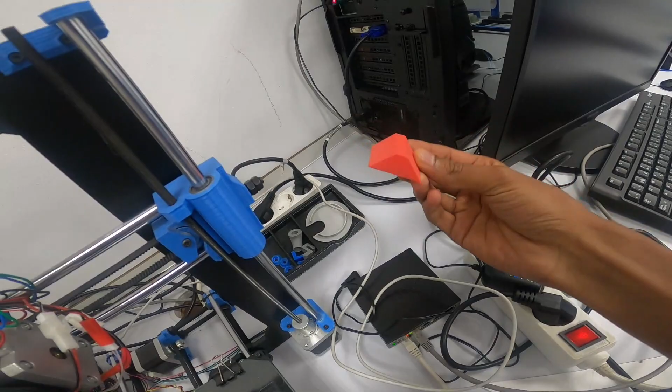Now we are moving towards the first lab, which is located at the international office of the UPCT. So let's watch what is inside the lab. We have two different labs we are going to visit. The first one is more related for classes, for laboratory practice. Okay, this one.

We have two different channels. This one has 12.5 meter length and 30 centimeters of width. This is just an open channel. This is a labyrinth weir that we are trying to analyze to know how it's working. Here we have another channel, a smaller one than this. And there is no water inside here.

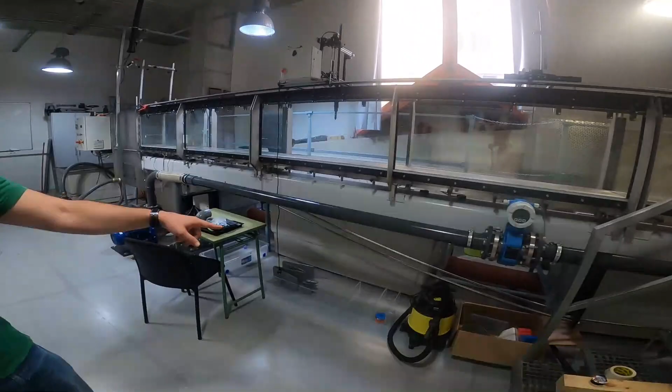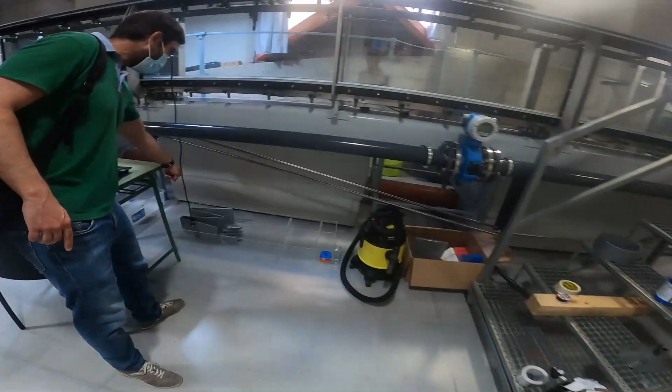Now we removed the water. I think this lab is now under construction. No, it's the other. Here you have several non-linear weirs. This is a labyrinth. This is a piano key weir that we test here. And there you have other models.

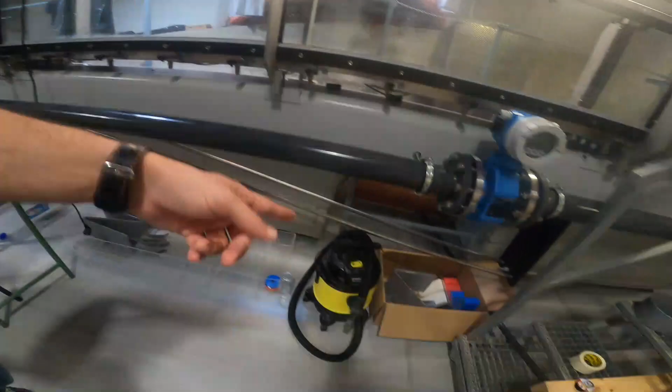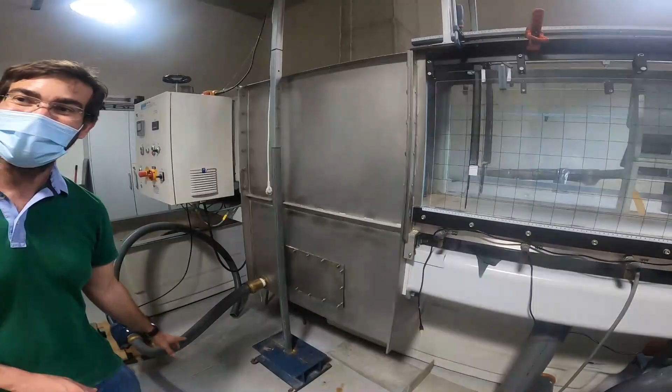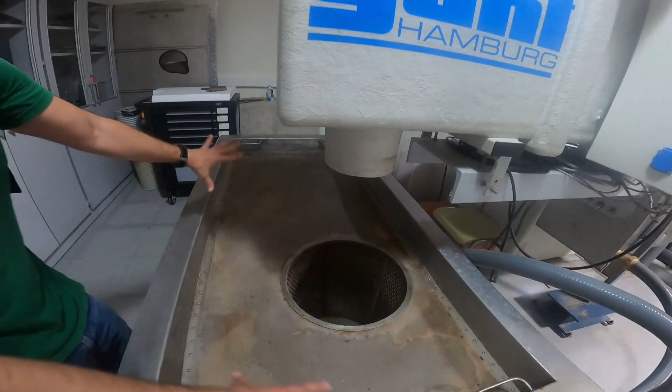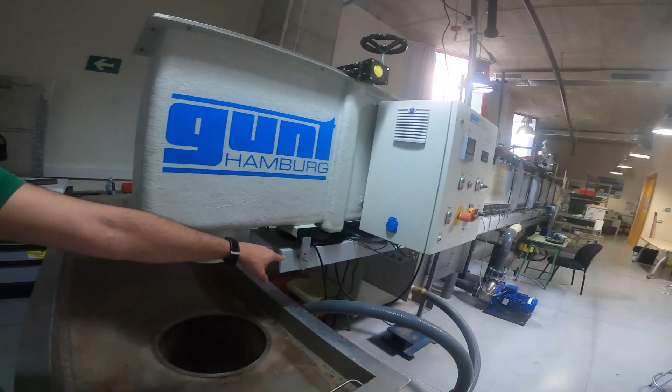This is a sediment trap, so we can recirculate water and also sand. What is this, the collector? Yes, this is the final part. This is the reservoir to maintain the water, and this is the filter for the sand. If the sand is not trapped by the sediment trap, it finishes here in this filter.

Here we have different parts. Ogee crested weir. This is a Venturi. This is for the smaller one, and here we have broad crested weir, radial gate, a plain vertical gate, piers with different shapes. Here we have different shapes and different types.

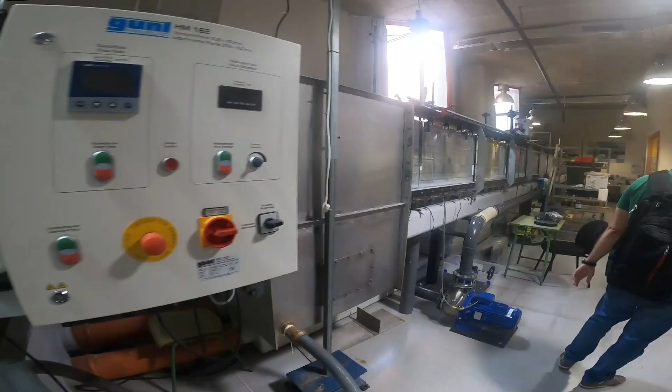Nobody is working here inside the lab right now. Here we have several of these with hydraulic jumps, with ski jump bucket, Parshall flumes, different weirs. Those are also for the water, to maintain the water. They all have a reservoir.

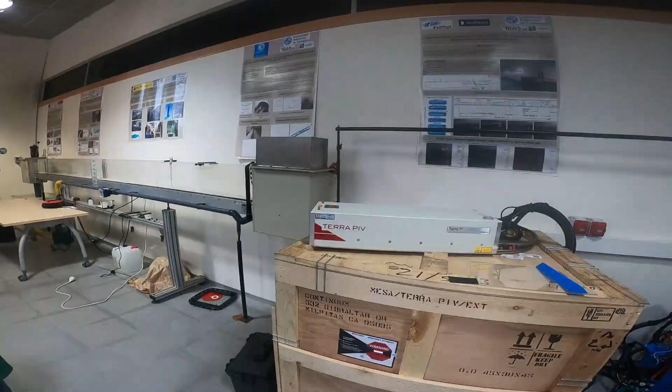This is a laser to measure with high speed cameras to obtain the flow velocities of the particles of the water. It is joined to the computer and gives data directly to the computer. You can obtain an image like this, the velocity distribution. Here you have the arrows indicating the velocity of the fluid.

Those are several studies we have performed in the last years with some universities, with the ministry. This is a study of a dam in Ecuador. This is another model that we have. Here is water.

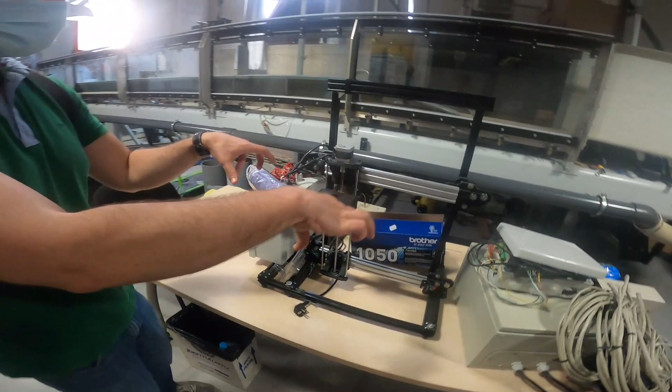This is a robotic location system for our probes that we are developing, to make it easier to obtain the data instead of using only the point gauge, to have something more automatic. This is one lab and there is another lab also. Okay, let's go.

After watching the first lab, we move toward the second lab of UPCT. So let's watch what is inside the lab.

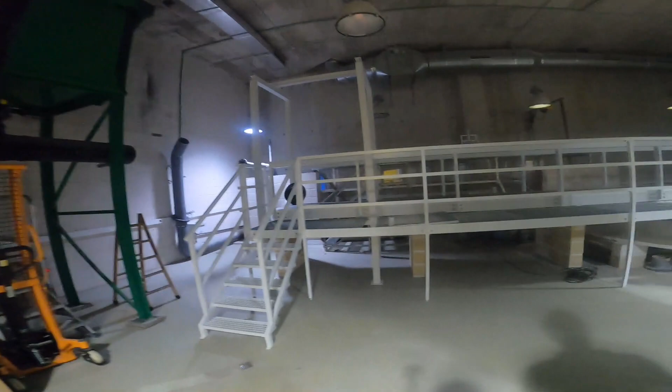So let's move one by one. Okay. This is a tank, also for water, but we are not using it right now. We have another tank in the reservoir for all the water.

So here, you can see we are changing. Here we have the pumps, the different pumps. We have 3 different submerged pumps to send the water by the pipe to the different models. This is a new channel that we are building. Okay.

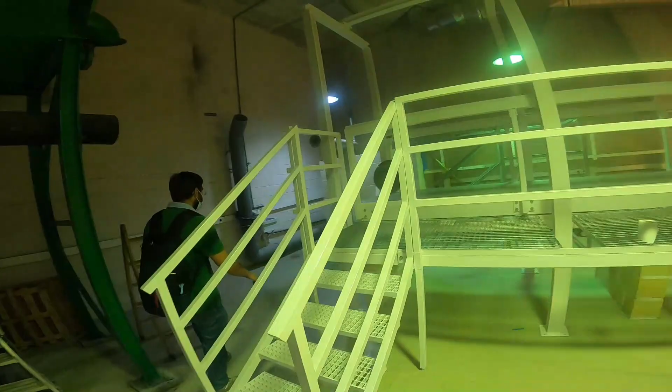The new one here. And inside here, any turbine? In Alfonso 13 we have a turbine, a Pelton turbine. Those are connectors for pressure sensors or piezometers.

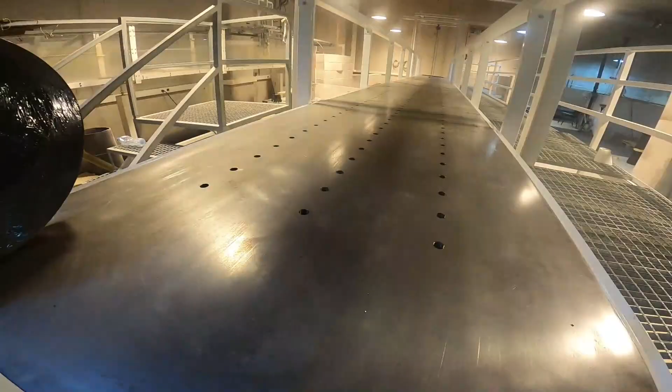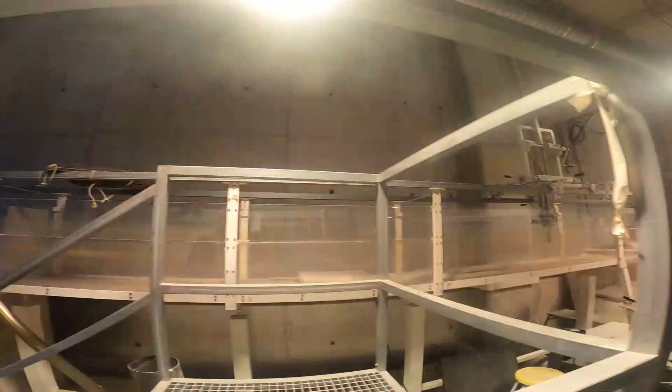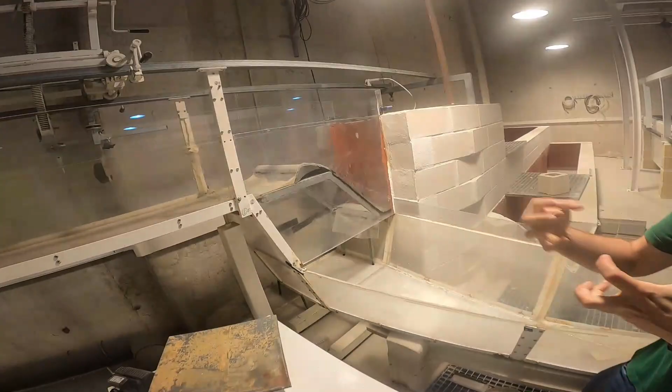Okay. This is another open channel flow. In this case, to analyze bottom intake systems, bottom racks. The idea is to collect the maximum amount of water with the racks, and all the sediment continuing in the river.

So this is the channel for water collected, and the sediment, the sand, the gravels continuing in the river. And this is sand, because we are testing with sand and different materials. And what can we find out from this experiment?

Here we are analyzing the clogging phenomenon. Clogging means clogging inside the pipe? Clogging is when you have, we can see there in the racks. Okay, let's go. You can see the rack.

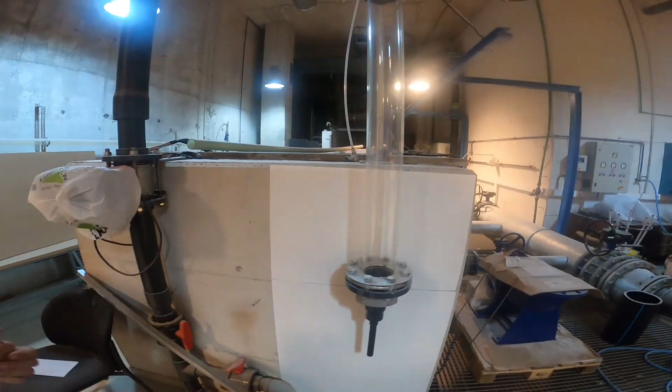This is a device that we are designing: probes to measure the amount of air that we have in the hydraulic structure, in a hydraulic jump, in a falling jet, or something like that. And this is a device to calibrate those probes. Take care here.

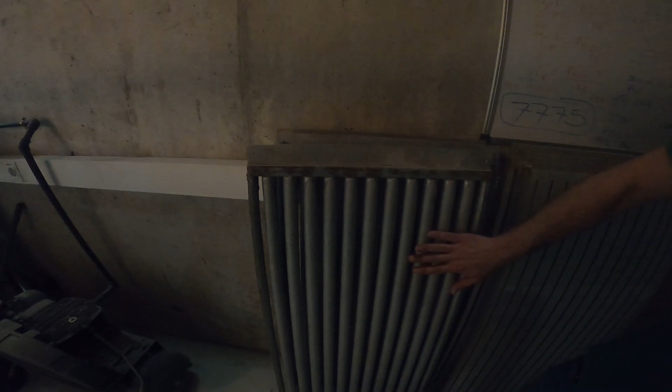For instance, those are bottom racks that we can put on the bottom of the river. But if we have sediment transport, this circular profile is going to collect a lot of water, but the problem is that gravels are going to be clogged until it arrives to an equilibrium, and we want to analyze the equilibrium.

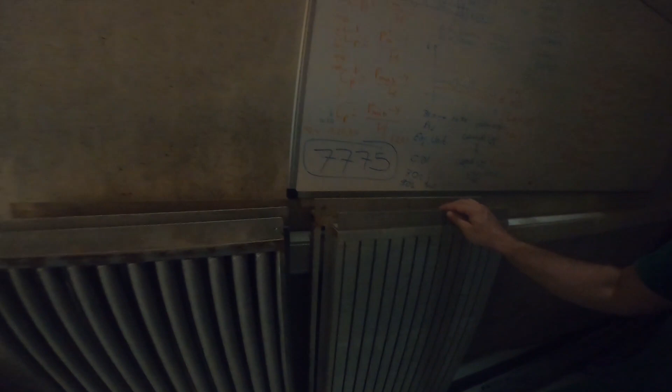This is more efficient to collect only water than this, but this is more efficient when we have sediment, because here it's more difficult to trap the gravels. And we want to know, depending on the basin and the terrain that we have in the river, which is better.

And this is a model. This is a sharp crest weir. Take care, please. This model right now is in the lower part, but we can move it from this part until this level to increase the falling distance.

We are measuring the behavior of the nappe of the rectangular jet, the velocity in different profiles, in different cross sections. Take care. So we are measuring all the fall, the air entrainment, how the air is entering into the water, and how it's dissipating energy depending on the specific flow that we have.

And later, when the water arrives to the plunge pool, to the bottom, it arrives with a certain energy. We are measuring the energy with different pressure sensors, the holes that we have there, and we can match the energy that the water has to scour or erode with the behavior of the rock or material at the bottom of the plunge pool.

If the energy of the jet is higher than the resistance of the material, there is going to be scour. If not, it's going to remain without scour. And here we can have a direct impact, having a supercritical flow, or using different water cushions, and depending on the water cushion, the behavior changes totally. It's a pity that we don't have water right now with the civil works.

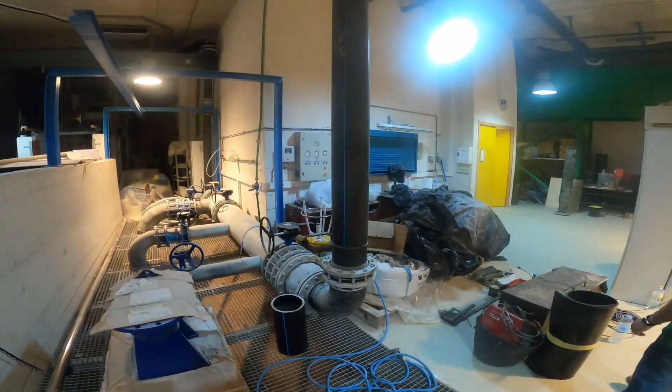And this is just to circulate water, yeah. We are going to change the pump. What is this? Is it ventilation? Ventilation, yeah. We have it here. And this is the channel for collecting water.

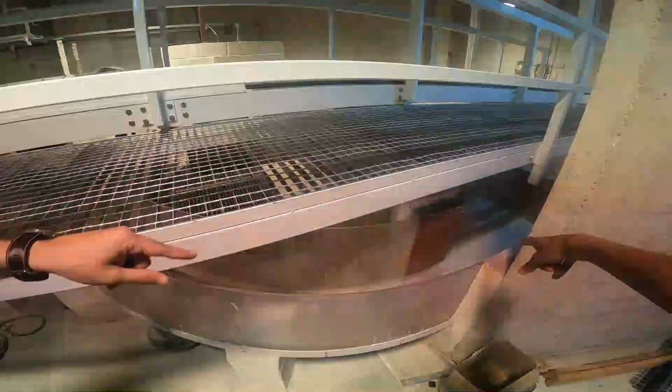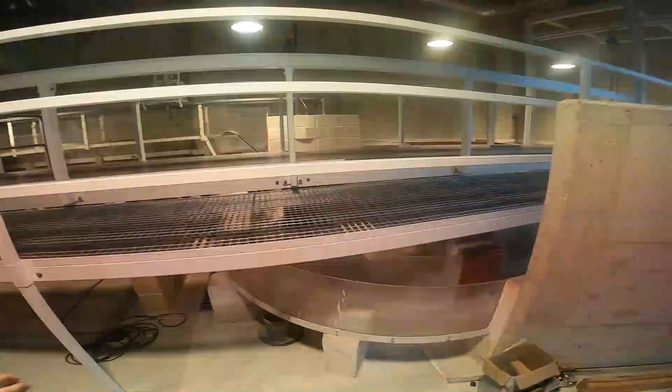It's in supercritical flow. The idea is the rack, but if some material, sand or gravel, overpasses the rack, it's in this channel. It arrives to this deposit where it's sedimented. This is a sedimentation tank or deposit. Okay. So this is also a reservoir. Yeah. So maybe, I don't know, in 1 month it's going to be working again. Right now it's a bit.

Mostly here are the open channel flow instruments, and also other instruments for pipe flow analysis. Pipes, we have a pipe system where we analyze what happens when we have a mixture of air and water in a pipe, and we have a few models, but for the classes, not for the research.

In the campus, in the other campus. Yeah. That we can see next week. I can show you. Yeah. He will arrive in 5-10 minutes. So he's collecting. Okay.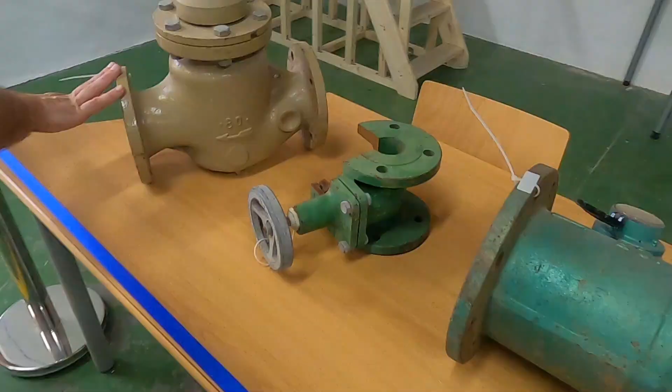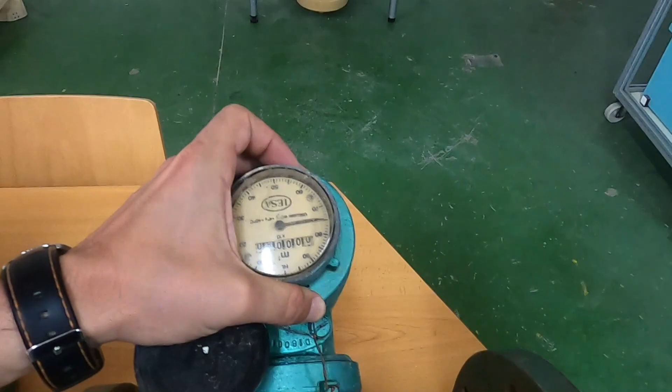This is an embankment dam, where we have the spillway. We have here another dam that allows us to intake, to collect water for a water potabilization plant with drinkable water. Here we have a small model of a turbine, to create energy. Flow meters, historical flow meters. In our case, we have different ones. And what can we measure from this? These are flow meters to measure the water, to control the water.

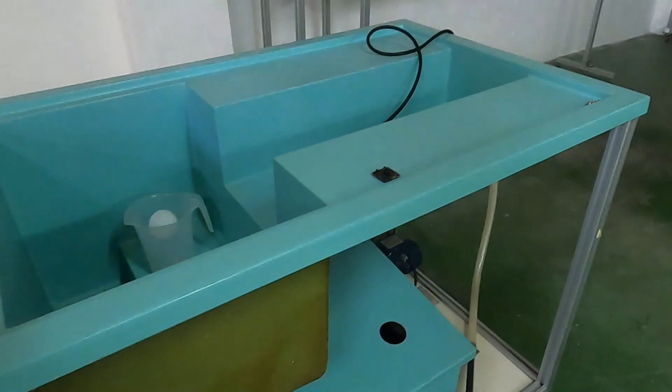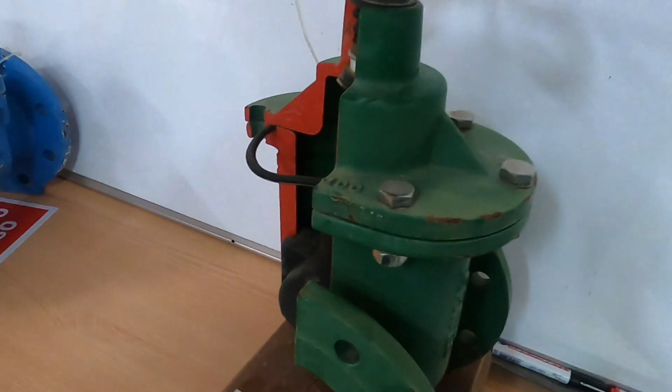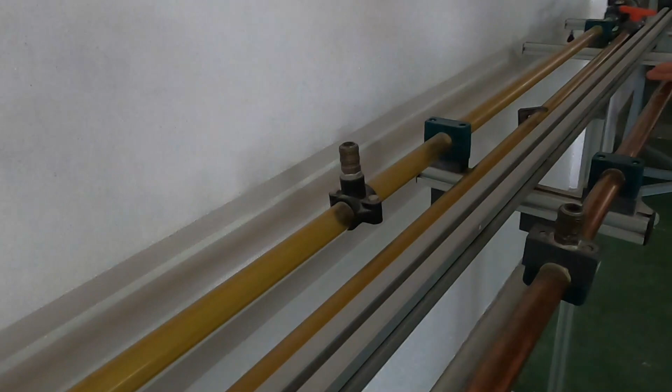This is a bench to create different projects, different practices. Here we have different ones. Those are also flow meters with different methods. This is a new one. This is a valve. This model is for water hammer, to check what happens when you close the valve quickly. There piezometers are fitted. Those are for sensors, and we also have piezometers. We can work with all of it.

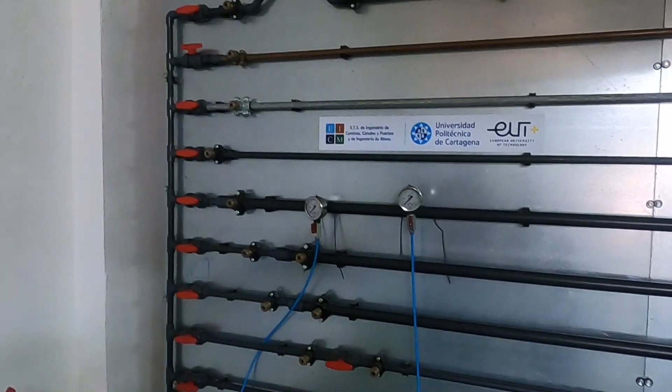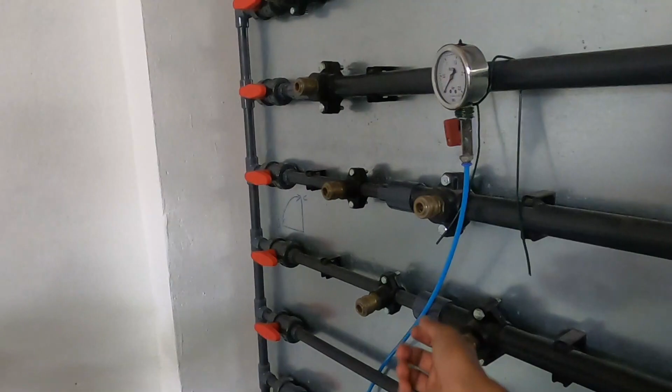This is the typical one for energy loss in pipes, considering different materials, what happens when we connect different pipes, with the manometer here and here, to check what the energy loss is. Here, is this only one lab or another also? No, here we only have this one, and the other is what you know.

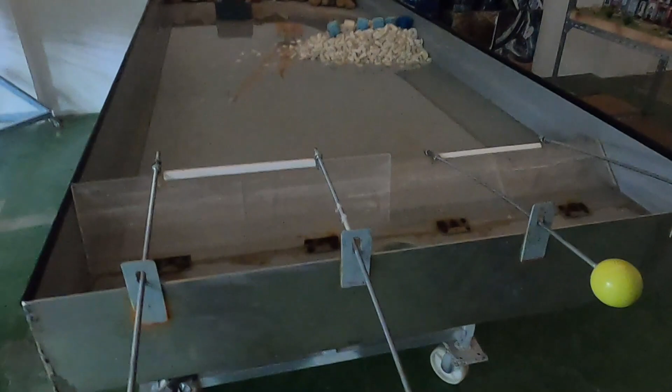And this is a small model of a harbor. A port. Where we can design the dikes. There is water. This or this one. We can consider dikes or vertical walls, with different material, with different rocks.

And this is a model to analyze what happens when we have rain in a street. So it's a rain model. And here, through this, there is infiltration. And here we have the different gates to collect the water. These are street inlets.

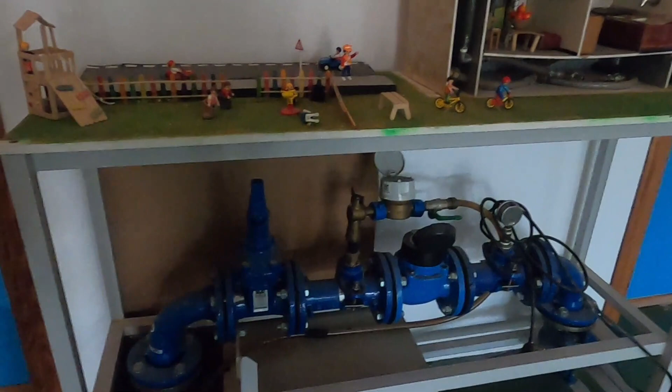And the water falls from here, from those. Here is a break to have drops, more or less, where we collect the water and finally we measure discharge. Right now it's not mounted, but here we have a reservoir, a small tank, and from here we pump all the water. And this is a small system, more advanced flow meters with different characteristics, to check how a house is working.

Here is closed. Let me check if I have TV. So this is the hydraulic lab. Oh, this is a ski jump, a concrete spillway. This is an arch dam. This is a labyrinth spillway. Different ideas.

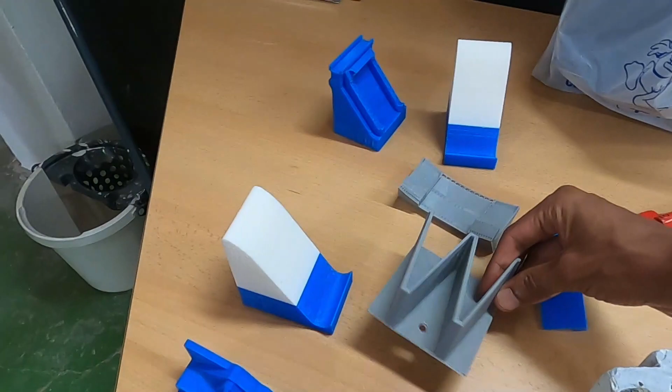Let me check if I can find this video.

It's from now. En este taller haremos que los niños jueguen.

This is me some years ago. Right. Okay.

And in this case we have the same as you have done in your project, but with augmented reality, where we can modify the terrain, obtain the elevation from a 3D sensor, and reproduce the effect of the water.

This, let me check. I think that I have it. Is this your own YouTube channel? Yeah, this is from the university channel, and I think that we have a better one.

This is the same. This one. I think that this is complete.

Hi. Sorry, I'm late. Oh, don't worry.

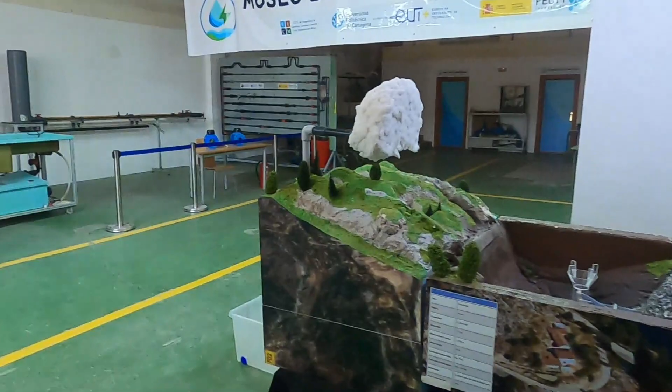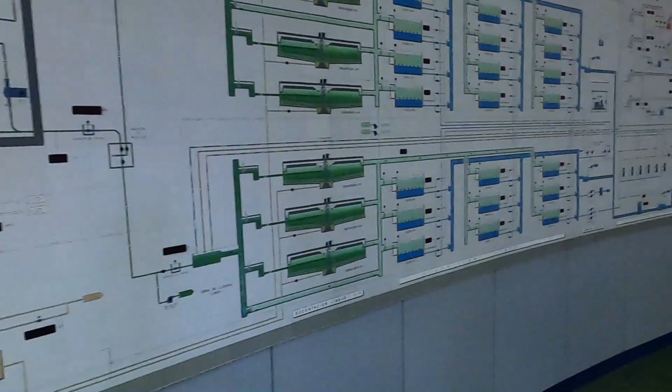Is this lab used now or not? We are preparing this for being a museum, and also to do some practice like that in that model, the water hammer, and some other practice that we have in small models. And here with this panel from this potabilization plant, we are creating a big model, to have here with a tablet and a QR code, so you can follow and visit the plant with the different steps, the filter part.

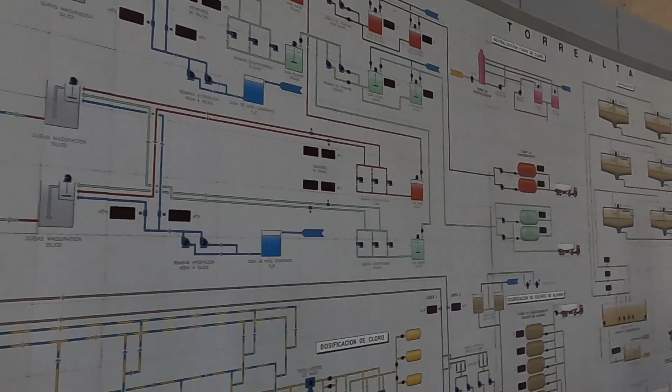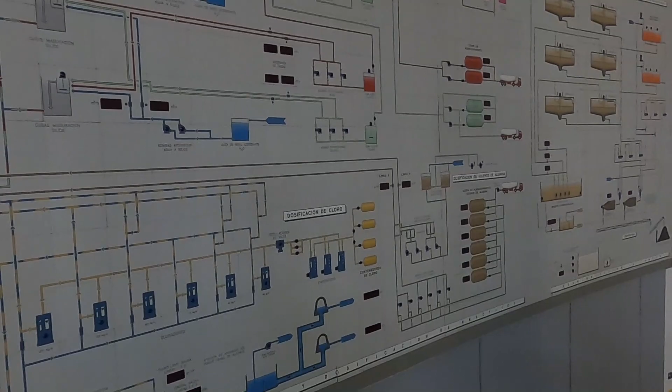This is for potable water. This is for potabilization. What does it mean? Potabilization? Drinkable water. Oh, yeah, potable. We say potable water. So using different filters, we make the water pure. Do you have to filter sea water? We also have several plants to collect seawater. And in Cartagena, what is the major source of water, either from the sea or from the river or any natural source? From both. Depending on the month, we have more from the river or more from the sea.

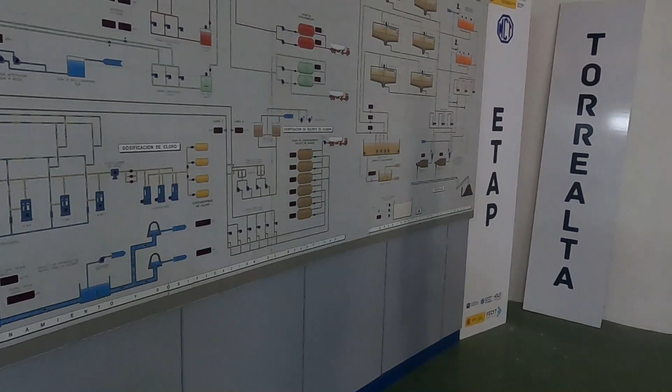Yeah, I didn't see too many rivers here. No, we have many dry rivers and not so much water. And we have a lot of farms. We have a lot of agricultural engineering in the surroundings. We need a lot of water, but we don't have water, so we need to have a lot of dams, a lot of channels to connect them, and we need to use a lot of water from the sea. Okay. That's all. Thank you so much.

I'm sorry, but I have another meeting. Okay. Let's go outside. We have a small gift as a token of love. A cap with a flag of Nepal. It's a gift for you. Oh, thank you very much. Could you take a photo, please? Sure. Oh, really nice. Thank you very much. It's really nice. And it's a flag of Nepal. Yeah. I saw it in your emails.